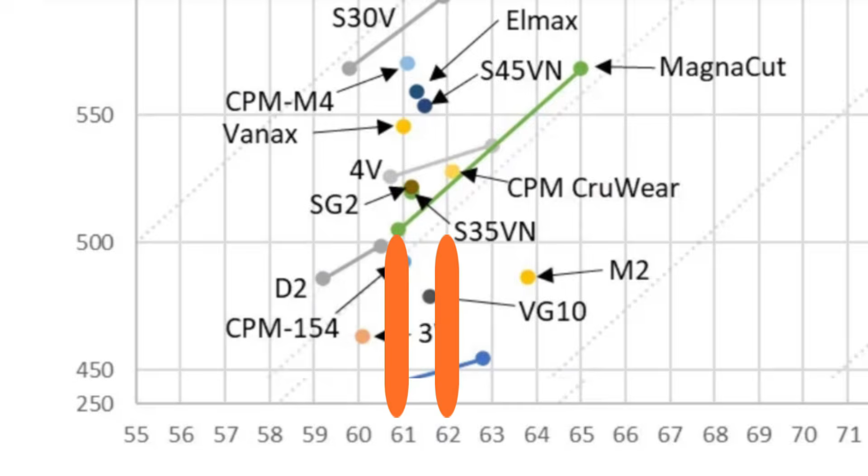And it's like a mass hypnosis. Most reviewers don't emphasize it and don't tell you about it. So all the company has to do is slap MagnaCut on the blade, and you all will go and buy it.

The one thing I always notice with Benchmade currently in their MagnaCut is they're doing 60-62 on the Rockwell scale. Actually, there is nothing wrong with that, but we'll verify this number.

And if you have a little time, I'll talk about the sheath. I'm going to bring you into my engineering world here and tell you what typically engineers do when a catastrophic failure happens like this, right?

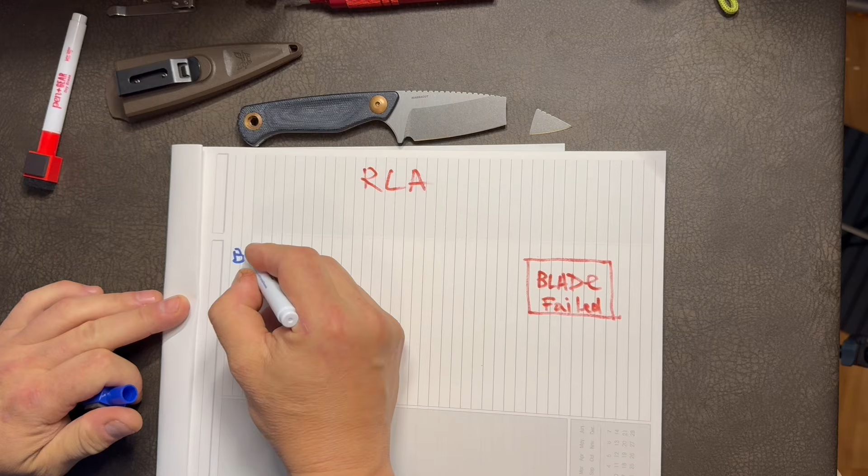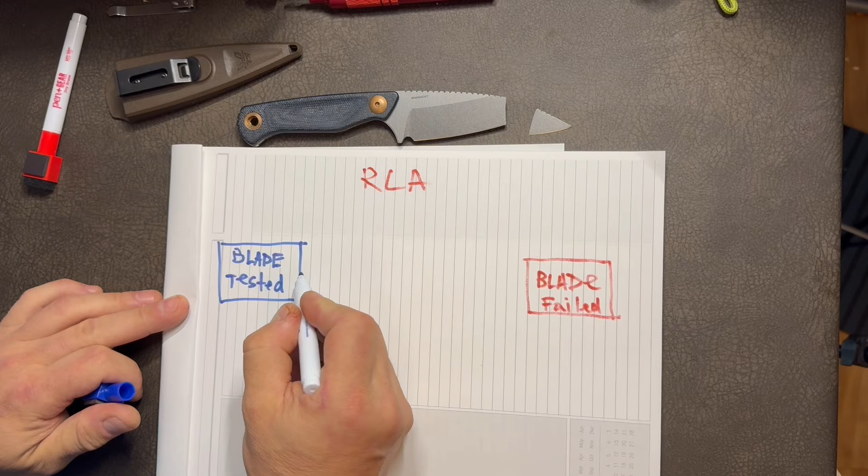So what we do, we conduct a root cause analysis, RCA. And here on the right, we write 'blade failed or snapped,' and it becomes a box like this. Here we put 'blade tested.' And so this event led to this consequence.

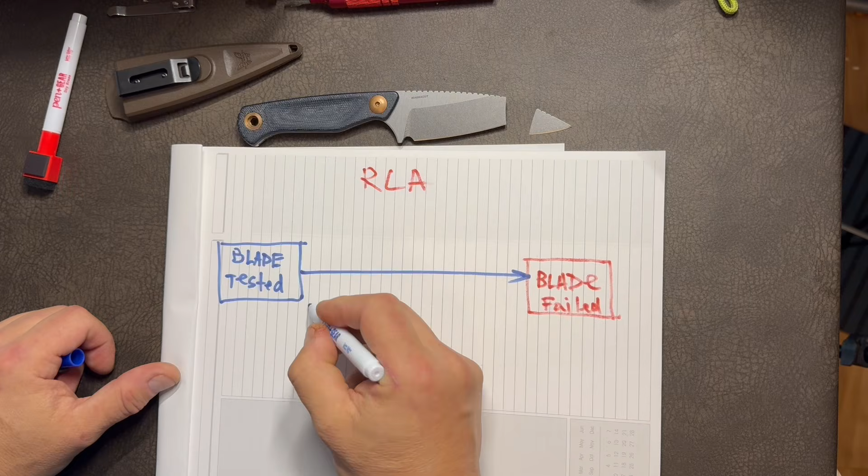And we create what we call a fishbone diagram. So we throw out what potential causes of failure could have been. For example, excessive force, that's a box. Blade too hard, so it lost its ability to resist strain. High heat treat, right? And so these are fish bones. And then another cause, poor geometry. Another one could be wrong steel material, wrong material.

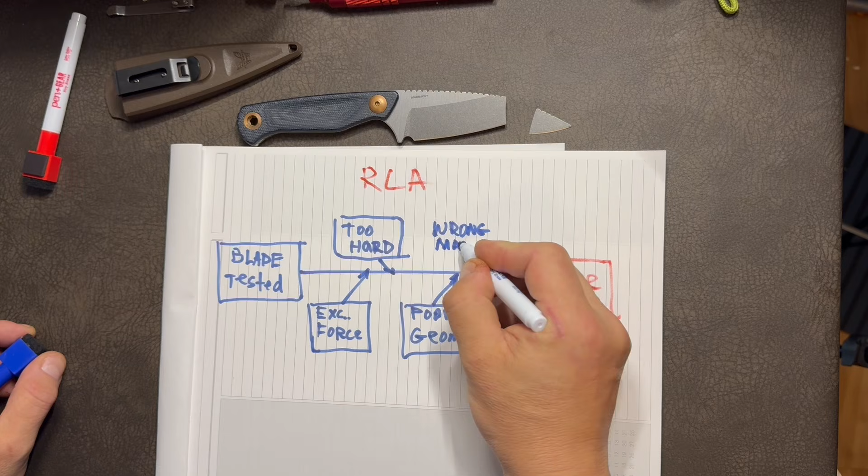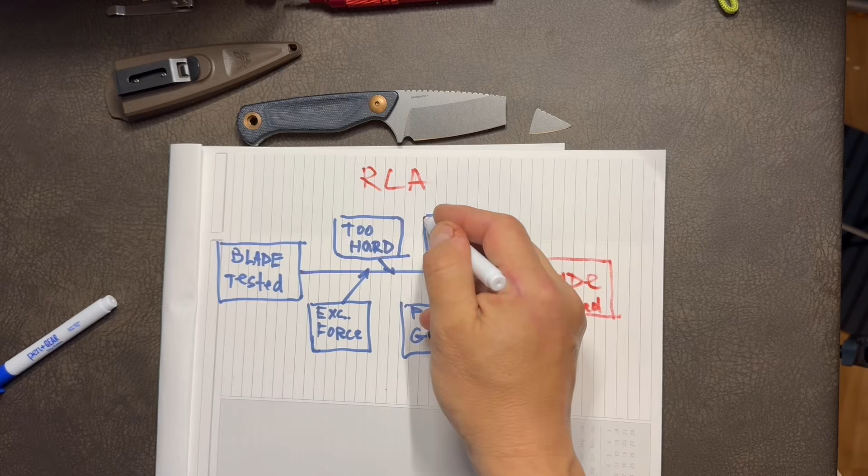Right, so we go and eliminate the ones that we considered non-consequential, and we do it through calculation, analysis, modeling, simulation, or retest. So obviously I'm not going to retest it. And according to the opinion out there in the market, it's not a wrong material because it's supposed to be the toughest, most edge retention capable, and corrosion resistant steel ever existed. So we're going to eliminate that just for the sake of this video.

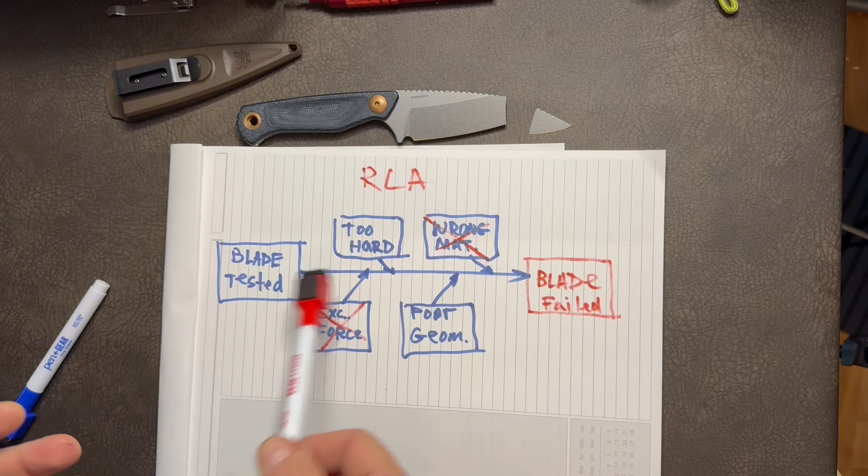Now we're going to look into, was the blade harder than it needed to be? For that, I need my Leeb tester.

Obviously, to test the hardness, I'm going to disassemble this blade. And for that, I will need a T10. This is Work Pro, my favorite, because it's so inexpensive and a good utility kind of driver with all kinds of bits here, link in the description. And I'm going to need this folding Allen wrench set. We're going to need 3/16.

So you're going to flip the knife to the side where the fastener in the back, that eyelet fastener, has no writing, and you're going to start unscrewing like this. You just insert it in and unscrew it. Okay, and eventually this piece will also come out.

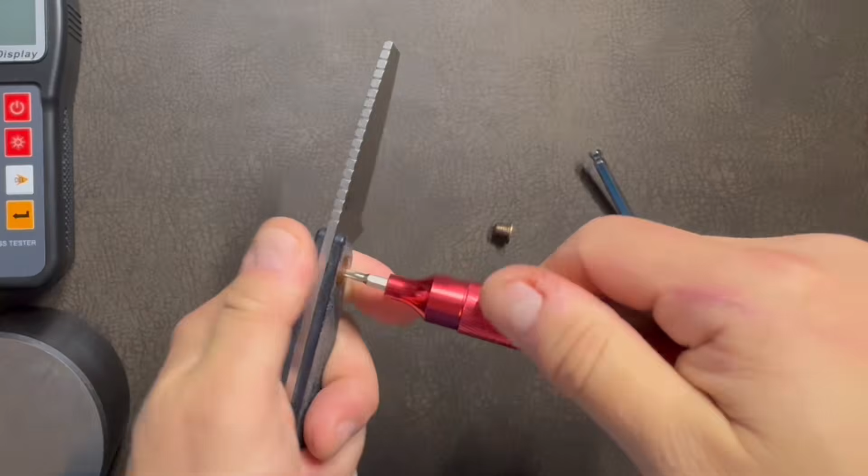And now you're going to use your T10 to take the front screw out. All right, and all this comes apart.

Interesting bundle of features here.

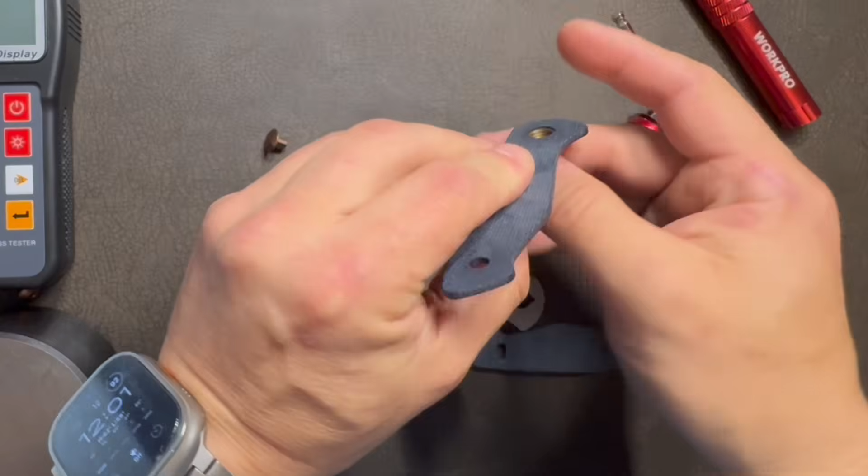So I found a minor design flaw here. When you assemble it together, this D-nut is retained not by the metal on the scale, but by this slot, so it has to fit into this. Let me show you from the bottom. It has to fit against this straightaway on this racetrack here. Obviously it comes from this direction. So if I put it in here, it freely rotates.

Yeah, so it's very strange that they used micarta as the media to retain the nut. My recommendation to viewers is do not put too much torque when you're assembling that, or you are risking damaging this slot. Yes, you have two sides to it, you can rotate it either way, 180 degrees, but eventually this may cram out. So highly recommend being gentle.

Okay, so why do I think these features are here? I'll talk about it a little bit further in the video. I'll explain why they're here and why they're shaped a certain way.

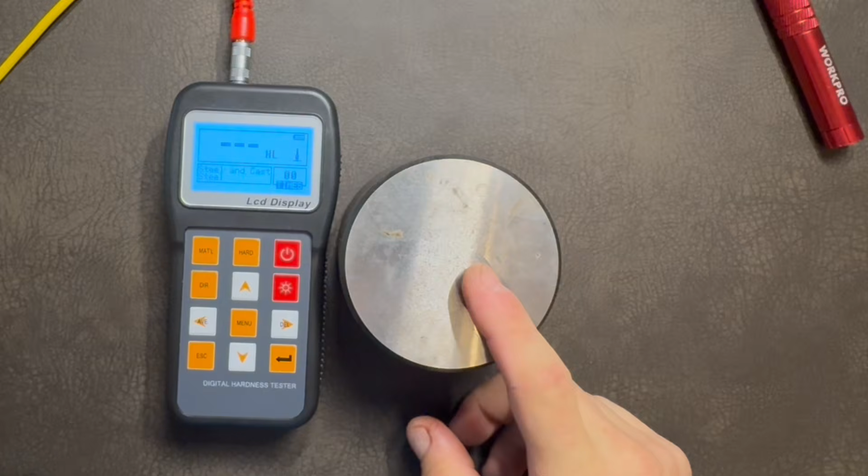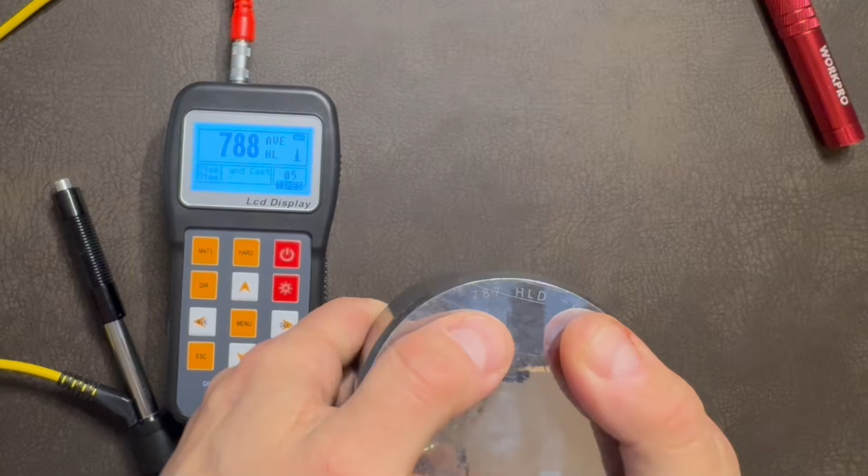First things first, I verify or validate the calibration of this device. The software is set up to calibrate it on the Hardness Leeb D scale, and that's why I'm keeping it at the HL setting. So 788, it's rated right here to 787 HLD, so we're going to call it spot on.

And now I'm going to reset this and test the blade. So I'm going to set that to HRC.

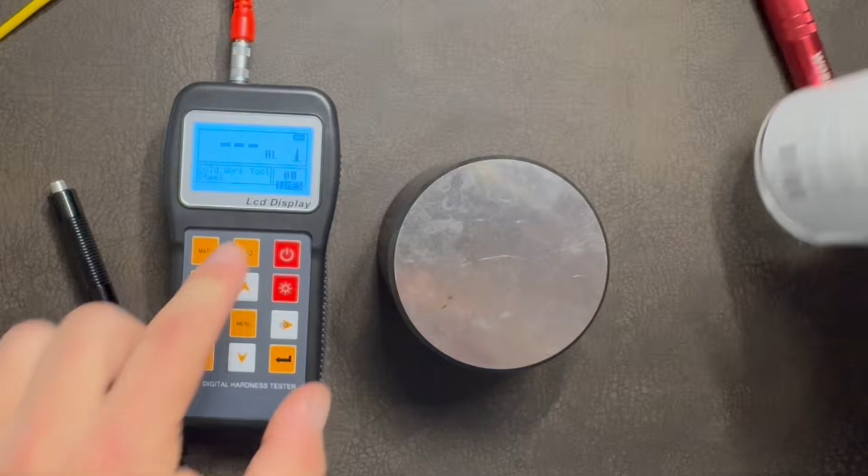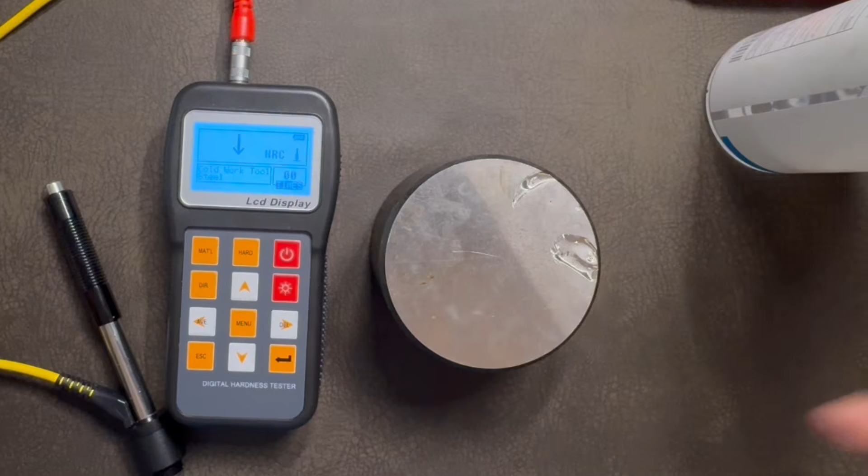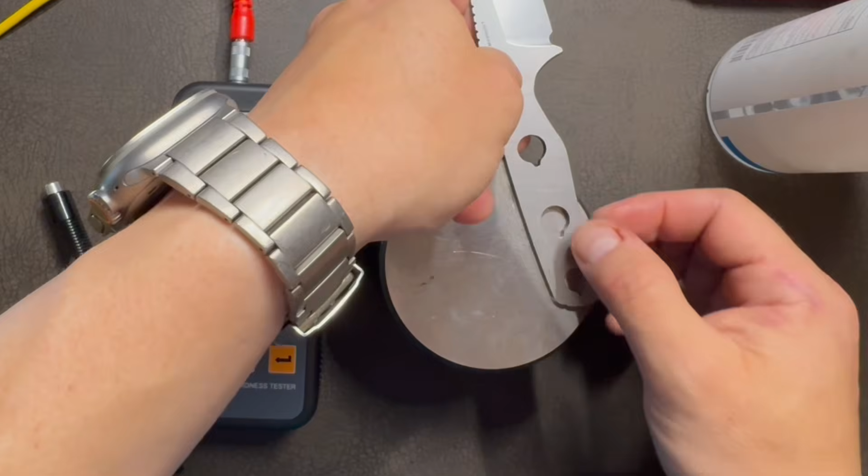I apply this gel. Actually, I'm not going to explain it here. I did several videos and my subscribers had plenty of opportunities to argue advantages and disadvantages of using this device and applying incompressible fluid to ensure a better connection with the block. So feel free to leave a comment, I will probably not reply. I'd rather send you to the video where I give a full explanation of this.

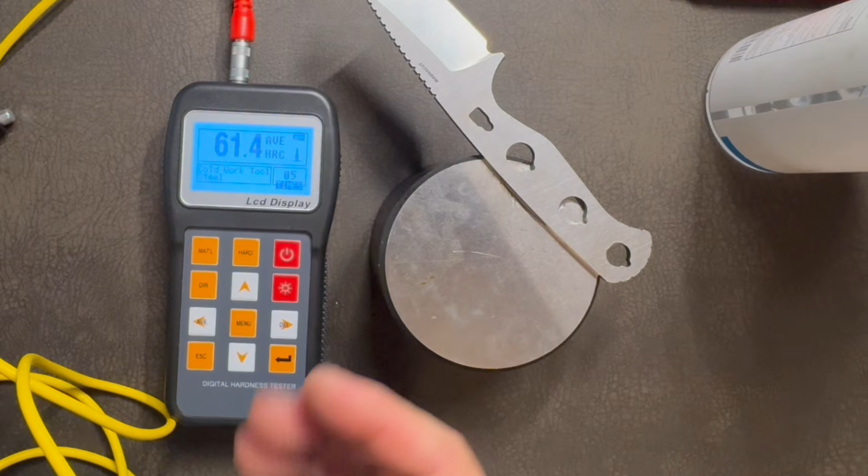So let's go. I'm going to strike 5 times, and unless there's sort of a weird outlier, kind of way out of range result, I'll accept the average, as is the case here, 61.4 HRC.

Benchmade advertises 60 to 62 for this knife, and this time they're in the range. That translates into 17 foot-pound toughness, which should be above S35VN, for example. Comparison knife that I showed earlier is made out of 420HC, which is not on this table, but its updated version, 154CM, is.

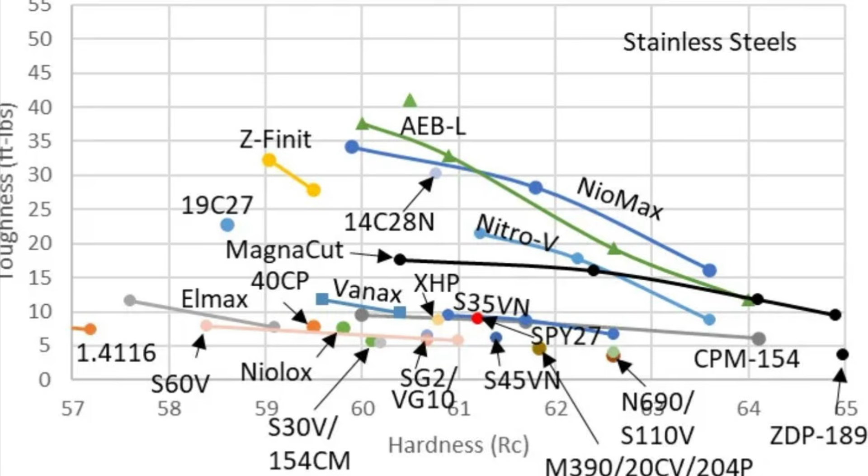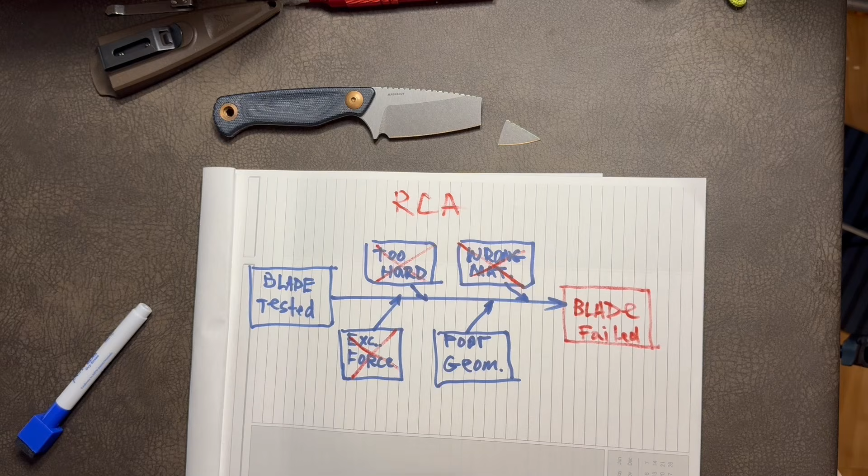I guess the point I'm trying to make is if 420HC did not snap, shouldn't a properly configured MagnaCut blade also hold up? Because at 61.4 HRC, it's 230% tougher. I will have to eliminate this cause because clearly it's in a decent range for toughness, looking at Dr. Larrin Thomas's table.

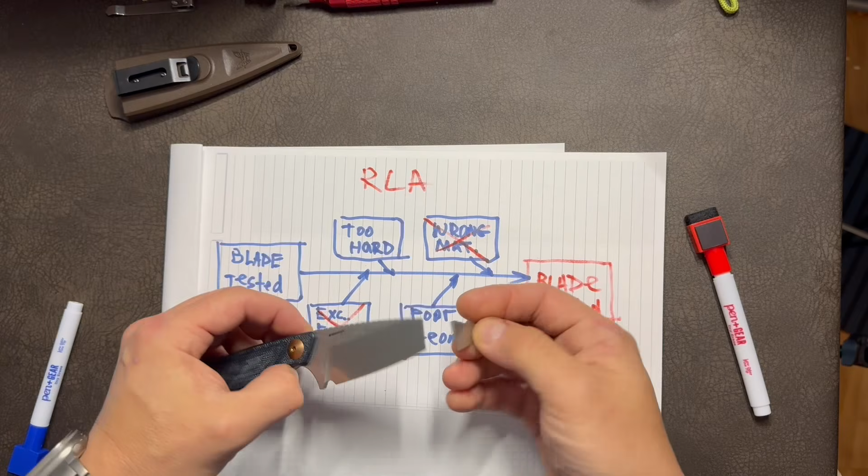And finally, we're going to look at the geometry. And by geometry, I don't mean the edge, I don't mean the geometry of the edge, the angles. I mean the geometry of this whole blade in 3 dimensions: angles, jimping, cross-section. By cross-section, I mean this area. We're going to take a quick look at that as well.

One can't talk about a blade's toughness without considering the geometry. And by geometry, I mean it in 3 dimensions, not just the shape, not just the bevel angle, but the actual cross-sectional area, which is without a doubt one of the highest contributing factors to the blade's ability to resist strain, which we simply call toughness. So let's sketch it out.